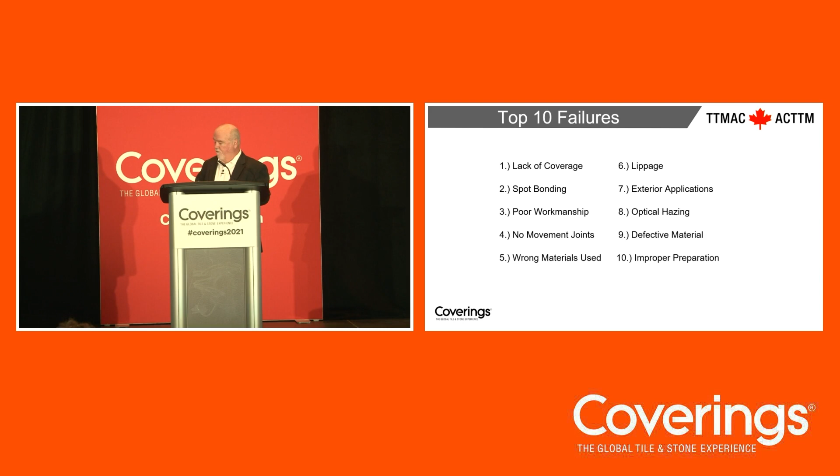So this is one of the ones that we see a lot, and that's lack of coverage. There's a lot of installers out there that still aren't following the recommendations of the NTCA or the 09 30 00 manual, where they're combing the mortar still in swirls. They're not back buttering. They're not placing the tile down perpendicular to the notches of the trowel and moving it back and forth slowly to push the air out and get in proper contact. And if you do that properly, in many cases, especially with a relatively flat back of a tile, it eliminates back buttering.

But this is something we see a lot. The first thing our guys do when they go in for an inspection is take a knife or something metal and start tapping it. Some guys like to use a golf ball. And determine what type of coverage they got. You can tell pretty quickly. And coverage is really important. We basically say interior 80%, and if you're doing exterior, 95 to 100%. And I tell you, you better try and keep it to that 100% if you want an installation that's going to have any possibility of having some life cycle.

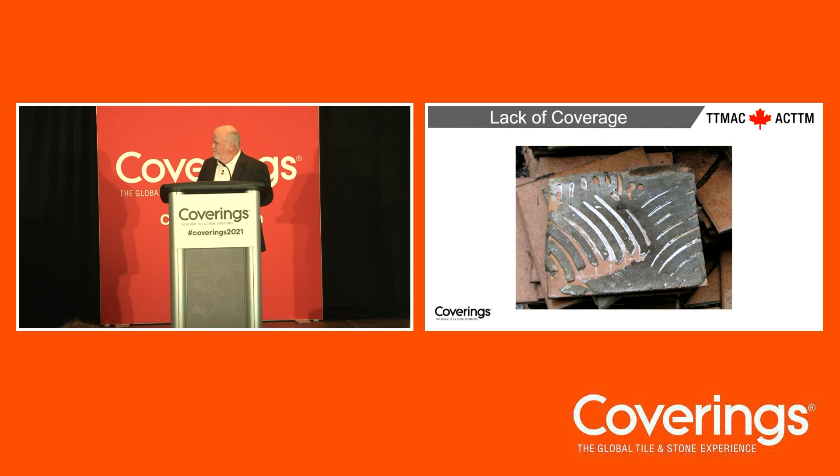This thing is sure sensitive. Huh, okay.

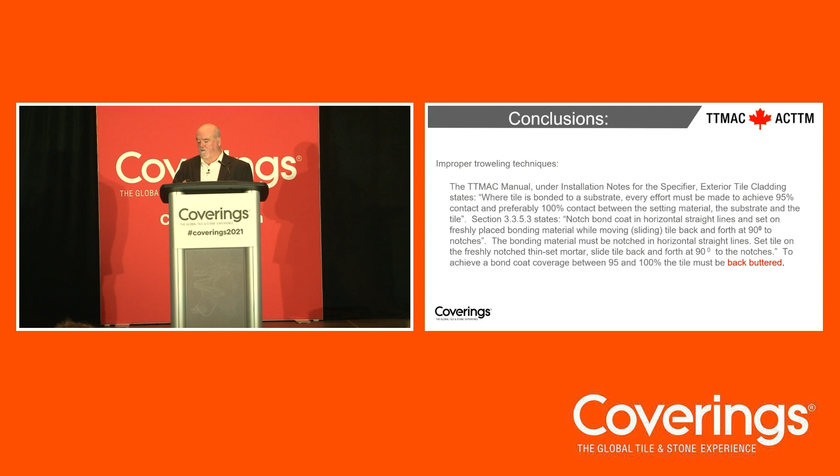So there, I've already kind of jumped through that, and this is from the TTMAC manual on improper troweling techniques. Again, the equivalent you'll find in the TCNA handbook. You'll find the equivalent referred to in the NTCA reference manual. But even though this is real basic stuff, guys, we see it all the time. It's really surprising how common it is.

This is another one I just don't get. And I've had guys tell me, I've been doing this for 25 years. It's always 25 years, I don't know why. But I've been doing this for 25 years, never had a problem. Spot bonding. It is on fire in Canada. I know it's pretty common in the United States. I know that Bart from the NTCA has said that they get calls all the time. It really is a really questionable installation.

Typically they're using just traditional regular mortar. They may not be using what we call the large and heavy tile mortar, which at least would have a half decent chance because it's made to go thick and won't have shrinkage aspects. But most of the guys are just using regular thin set. They'll be using a 118.4 or a 118.11 or 15 maybe. And even if 15, well, that's part of the large and heavy tile mortar. A 15 mortar still doesn't allow you to do this.

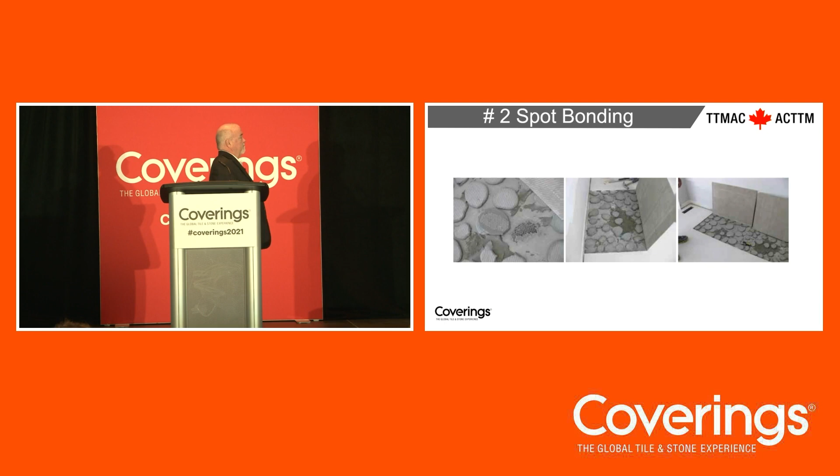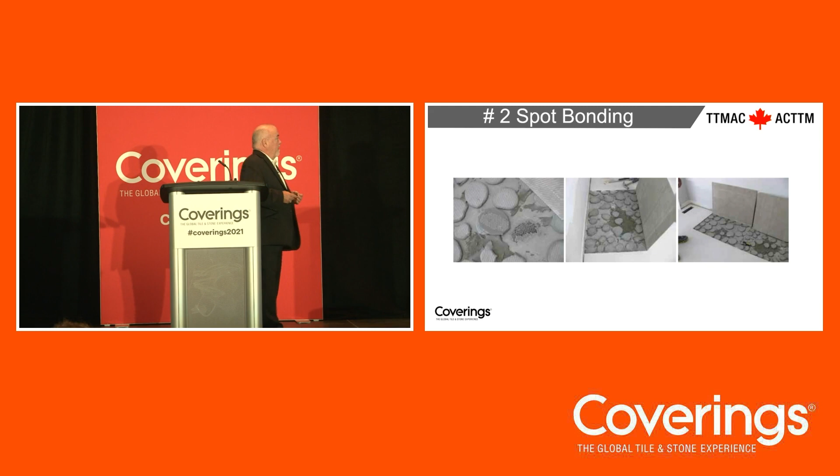But if you look at that, first of all, hollow sounding. Second, you're going to have a reduction in load bearing capability. Three, if you're in a wet area, shower area or whatever, or even worse outside, which I do have some photos of, where spot bonding was used. Where's the water going to go? It's just going to sit there and accumulate. Then you're going to have gray water, black water, mold growing, what have you. It's just a really terrible way to install tile, and we see it time and time again.

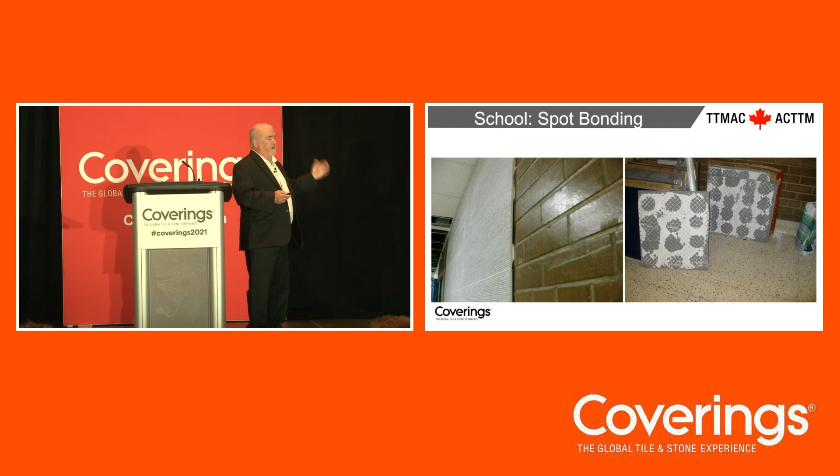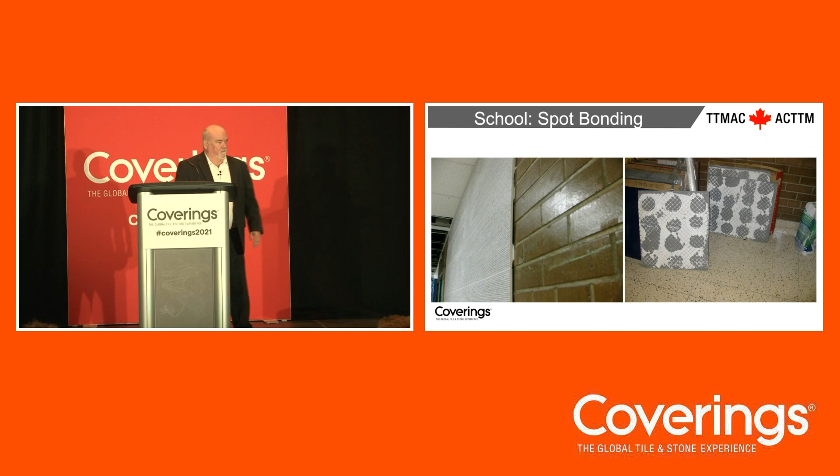Oops. This was really scary. This was a school, and we literally ended up taping off the outer area where this was done because those tiles, if you hit them hard enough, were falling off. So imagine, this is like an elementary school. One of those tiles probably could kill a small child. So really, just ridiculous to see this being done.

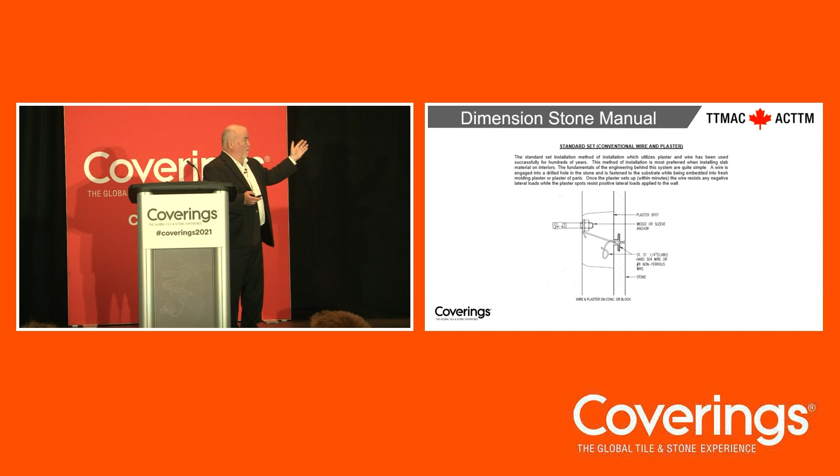Now you might say, well, where does this come from? At least in Canada, and this is the same in the Natural Stone Institute manual, there is a method of spot bonding for hanging stone. What they do, though, is they use pig wire, and they have mechanical fasteners on the back of that stone, and then they'll have the spot bonding behind there. So they're not relying on that spot bonding really to hold it up. It's really there to just make things uniform and even, and give it a little bit of support when they attach it to the wall. So this is where we're thinking this is probably coming from, but it really is an installation that's basically going to be a disaster.

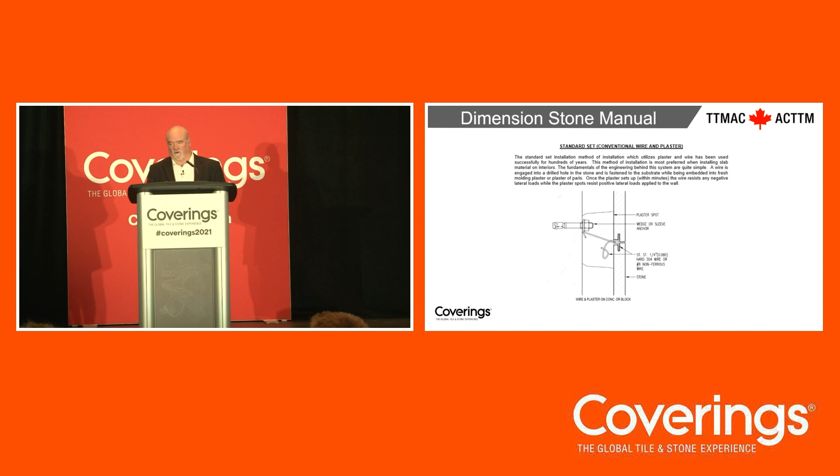And again, we call this out in the 093,000 manual. If you go to the NTCA reference manual, they've got a whole section on it, 2 pages, as we do in our equivalent manual with the Tile Contractor's Handbook. And it really is something that we strongly recommend that you do not participate in for an installation.

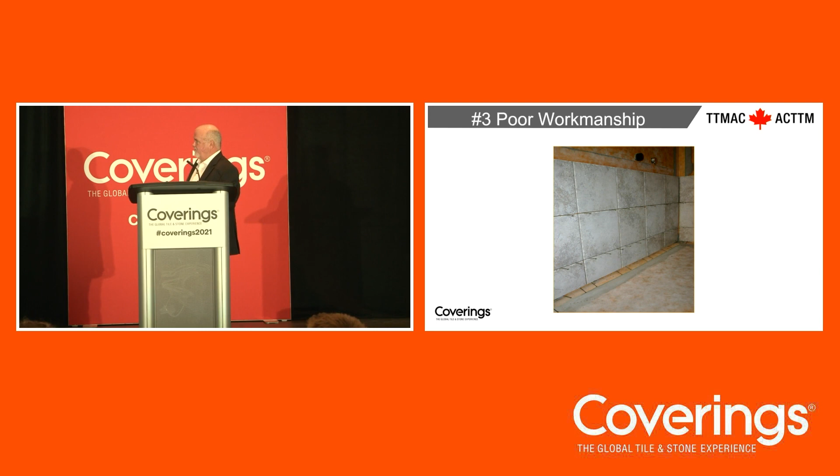Poor workmanship. What's wrong with this picture? That's a waterproof membrane behind there. And this gentleman actually sent this photo in saying, look at this, I found a great way to hang tile on a wall using nails. So obviously, this is not recommended by anybody. And obviously, poor workmanship to the worst extent.

And there's other references I had on here before, I lost my presentation, but in our 093,000 manual, we actually have a master spec in the back that is done by Keith Robinson. He is one of the top spec writers in North America. He not only has won awards in Canada, but he also wins awards down in the US. And there's a lot of architectural offices that will actually follow his formats in his master specs for whatever division. But anyways, it calls out the installation and the execution and the guidelines that they should be watching and making sure of.

It's something, again, every manual in the US, like the NTCA reference manual and the TCNA handbook, have areas where they give you the guidelines. ANSI A108 as well, in the beginning for general, tells you all these requirements to do a proper installation. No movement joints.

Whoops. This, and unfortunately I had a couple more slides that showed it from a wider view, but this was pretty amazing. This was a church in Quebec City, and they decided they wanted to clean up the floor, and they had all the pews on top of the floor, and when they moved the pews away, the floor literally just erupted, like you see here. It's like waves of tile that popped up.

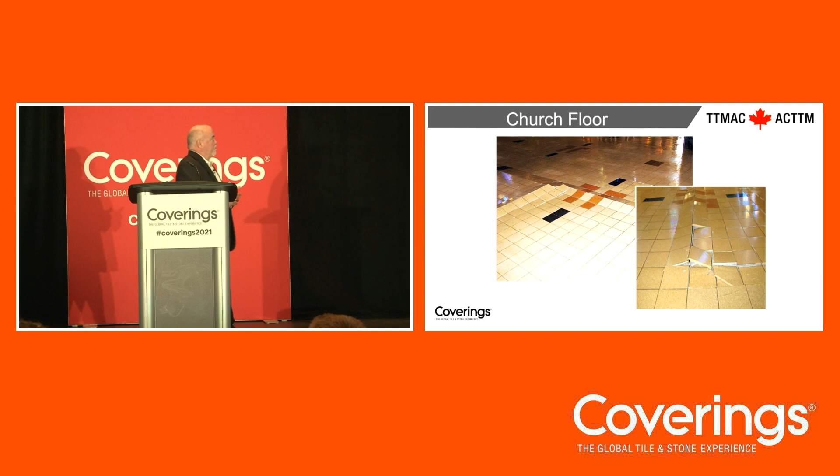changes in humidity, especially say you're on a wood floor. The wood is hygroscopic. It wants to absorb and release moisture, so it's going to expand and contract during seasonal changes. Hopefully you use some type of membrane underneath, like an uncoupling membrane, but still, it doesn't eliminate the need to have movement joints. And so in both Canada and the US, we have specific details in our manual.

Now, we don't have Wi-Fi here. You might want to just look at this. You could probably find it pretty easily. Just search on Facebook, tile popping or tile tenting. If I was able to play this video, they actually have video that people were able to witness where the tile looks perfect, and all of a sudden the tile just starts popping off the floor. It almost looks like it's fake, because you can't believe that's really happening. But there are actual people who have been able to catch that on video, and it's pretty entertaining to look at.

And again, that may not be 100% because of lack of movement joints. Lack of coverage is probably a big issue too. There may be bond breakers on the back of the tile that wouldn't allow for a decent bond. There are all those other aspects that need to be taken into consideration. And when we do an inspection, we are able to see that and we'll report it as such.

But the 093,000 manual, and then the TCNA handbook. And the TCNA handbook has actually evolved quite a bit. They've added quite a bit more information there. I didn't realize how much it changed till I went to the latest edition for 2021. So now I'm going to have to go and revise ours so it looks like we're keeping abreast of the new information that is out there, which Tile Council is now citing.

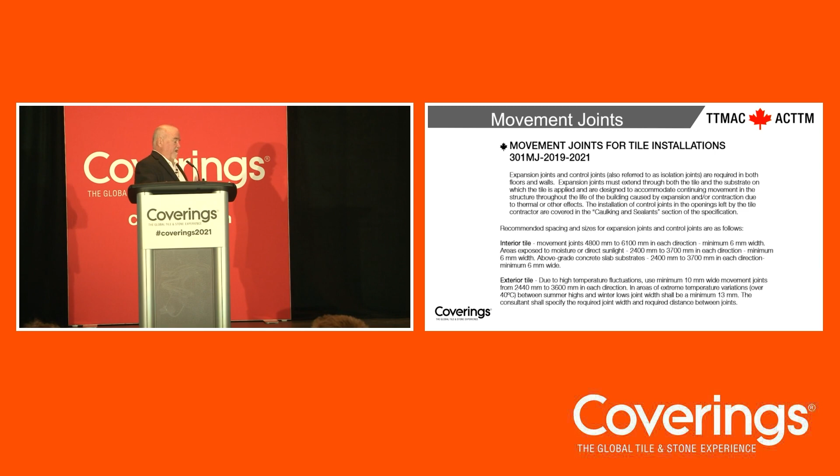So you have the equivalent in the U.S. The distancings are similar. Basically, you're looking at interior without sunlight, we can go up to about 16 feet in Canada. If it's interior with a lot of sunlight, we recommend to go no more than 8 feet. And then in exterior applications, same thing, a very conservative 8 to 12 feet max typically for allowance of those high fluctuations in temperature.

One thing we added, and this is actually out of ANSI A108. In Canada, we added the fact that you can now do nonlinear movement joints. We realize the only way you're going to do that is with a sealant, and you have to make sure the manufacturer does recommend that their sealant can be used in such a configuration, because you're going to have multiple stresses in different directions going on.

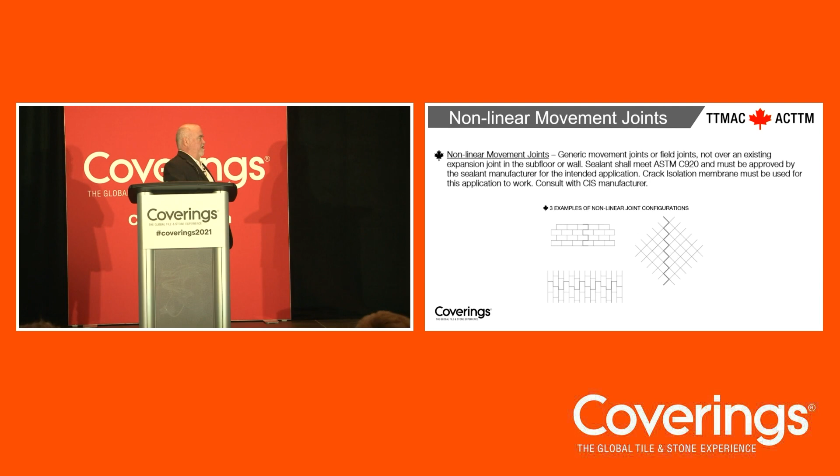But this has actually been a nice addition, because this is where we can sometimes get the architect to specify the movement joint, because they're not breaking up the tile field. They can do their basket weave, their herringbone, what have you, and get the sealant so if they blend it in properly, the color of caulking matches the grout so that it's not so visible to the eye. Whereas if they have to cut it, then obviously it now ruins the pattern. So we do recognize it now in Canada because of ANSI.

And that was a study that was done by Tile Council. At first, Tile Council said, no way. They said, there's no way you can do this. It's impossible. And then we had a consultant that said, no, I've done it. I've tested it, and it does work. I've got sealant manufacturers that say it's good. And TCNA did some testing over a couple-year period and came back and said, you know what? We apologize. You're right. It does work. So this is kind of a nice addition. It helps us for these issues where the architects don't want to or are reluctant to specify.

I'm sorry, does it increase? No, not really. I would expect that they're probably going to want to match the grout joint width. But if they go really tight with their grout joint, then they're probably going to have to go wider. Typically, 3/16 of an inch is typically the minimal thickness. I've seen 1/8 inch sealant joints.

I've got malls near my house. I live in Canada, in Montreal, and they don't work. I'm telling you, it's just too small. Maybe if they did a higher frequency, but they don't. They'll still try and do, say, 16 to 24 feet, because it's closed in, no sunlight and all that, with a 1/8 inch sealant joint. And I've got a mall near my house where the tile is lifting in different areas. You walk on it, you can hear it, it's hollow, because it's debonding from the substrate.

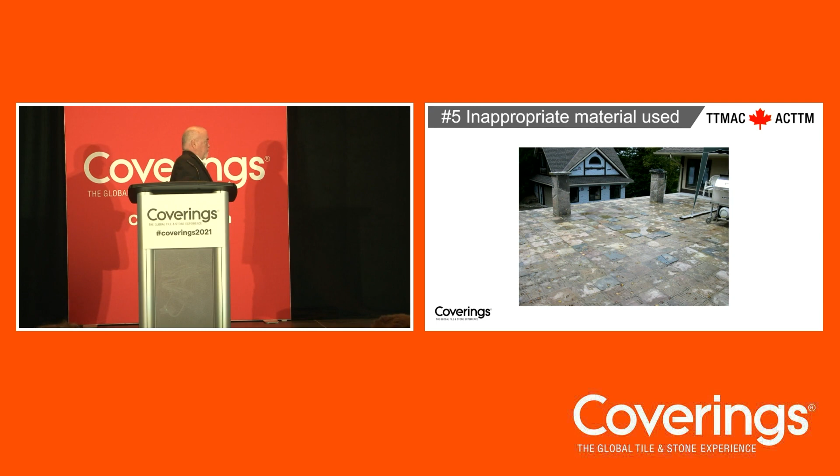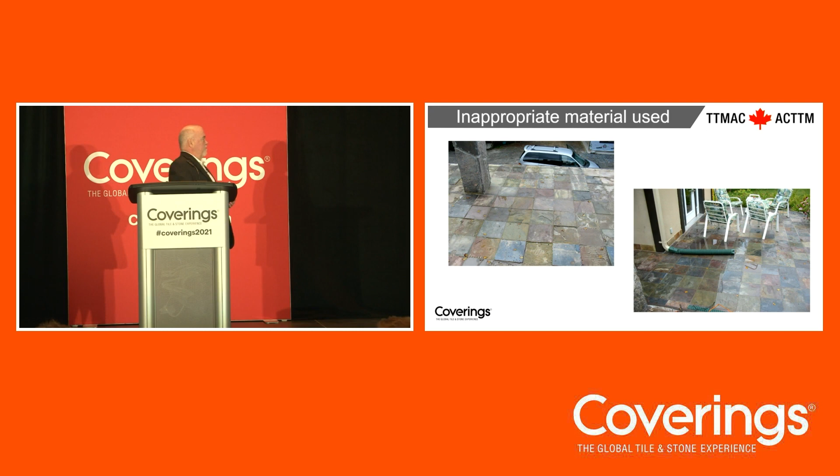Same photo. Now, again, notice the water collection. They got negative slope. So, you talk about shooting yourself in the foot. They did about everything wrong so that this thing would be a disaster.

This is bluestone. Bluestone's extremely water absorptive. And this is in Vancouver, on the coast, right on the beach, near English Bay, if you know Vancouver. And every time it rains, you get this halo effect where it's dark, depending on where it is in its drying period. The customer was really upset with this because they had bought this gorgeous stone, expecting it to look uniform and beautiful, and then every time it rains, and they did try putting some sealers in, it just doesn't work. And they had this halo effect going on.

One of the things that they could have done differently was to put a drain mat underneath, because this was a mortar bed that they used underneath it. So at least when the water got in, it could easily then evacuate from the area with, again, a good proper slope, 2% off to the outer edge of the balcony. But really not probably the best material for a wet environment like Vancouver.

I mean, my father always joked in Vancouver, because that's where he lives still, that they have the Vancouver Rain Fest, starts January 1st and ends December 31st. So we get a lot of rain there.

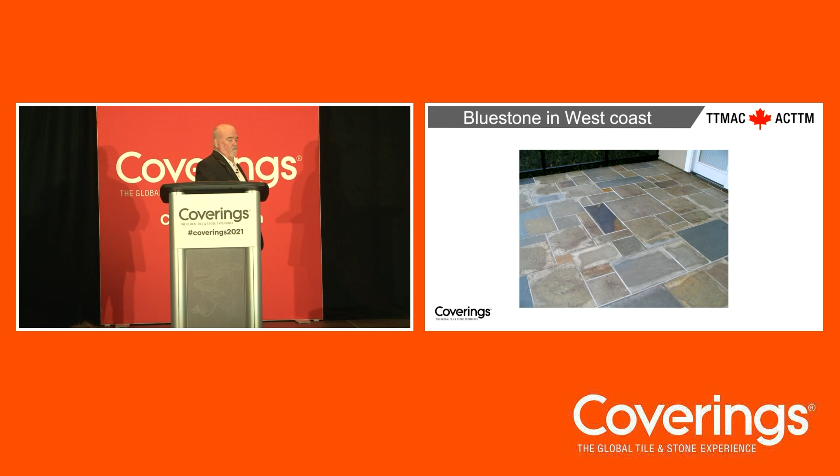But the reality is, if you walk the show, it's absolutely unbelievable what they can do with porcelain today. With the 3D, they can do it with the ink, but now they're doing it with the glaze. And instead of using a natural stone outside, and I hope Chuck's not here from the Natural Stone Institute, to me, I would be using a porcelain outside that looks like stone if that's what you want, but God, you're gonna have none of these issues. You still have to install it properly, but to have your expensive stone like this really not giving you the appearance that you're looking for, it's just not worth the expense or the anguish.

So what we do have, and this is reminiscent of the NTCA reference manual, and I think the TCNA handbook also has a section on this. Their book is so big, it's tough to keep up with it. But there's a listing of unsuitable substrates, which hopefully most of this is pretty obvious to you. And then we got some of these questionable substrates. When the questionable substrates come up, this is where you really need to talk to your manufacturer, talk to the installation materials representatives and find out what they recommend for these types of situations. Because they probably have a solution. And if they don't, then maybe you should think about not going over top of that substrate. But you can see that the list is pretty big.

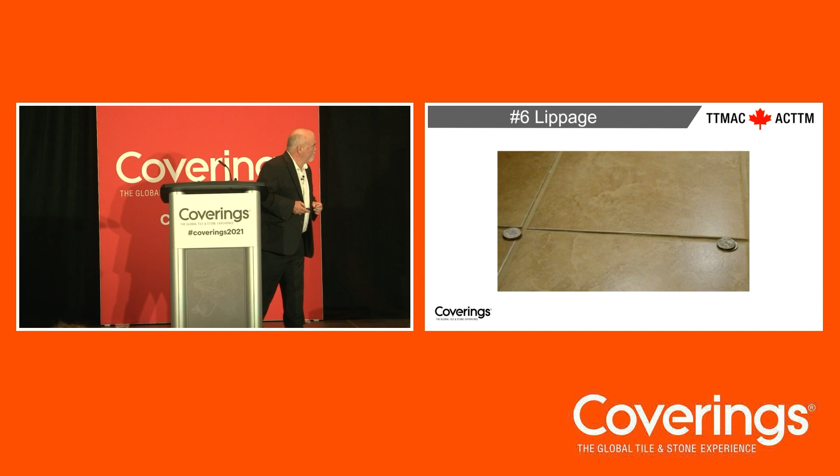Another big one is lippage. I mean, this is terrible. You catch your toe on this. You got a tripping hazard with this installation. You can see they're using, was it pennies? Pennies, or I can't quite make it out. But anyways, they got 2, almost 3, I think it's pennies, to just show you how much lippage was going on in here. There you go. If that was on a wall and you want that kind of look, some of the new trends right now are kind of reminiscent of this. This is a floor. And notice what they got going on there too.

Is that a 1/3 offset? Well, if you look at it, it's inconsistent, but some of those joints are right in the middle of the next tile. If you look at the third one up, it's almost right in the middle. So of course the lippage is going to be really excessive. Especially with these rectangular type tiles, you really want to do the 1/3 offset, which is recommended by NTCA, TCNA, and the 09 30 00 manual in Canada. Yeah, this is actually not a residence. This is a commercial installation, if you can believe it.

So again, you have your guidelines that reflect the maximum amount of tolerance in the facial dimensions of the tile itself and what's allowed, and then you combine that to come out with your allowable lippage, also based on your joint width. This is out of the 09 30 00 manual, but it's pulled out of ANSI and is also shown in the TCNA handbook as well.

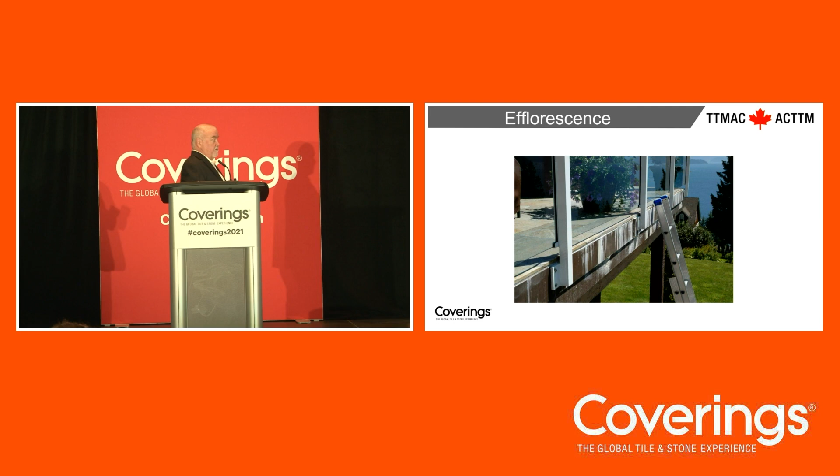It's soluble salts from the Portland cement washing out because the mortar underneath is being exposed to moisture. And if you don't tent off or hoard your installation and make sure that mortar has a chance to set up, that's really the key to try and prevent efflorescence. And I can tell you, there are some mortar manufacturers out there that do claim they have efflorescence-free mortars.

If everything's perfect, maybe, but I've used some of their products and it still had some efflorescence. Now, nothing like this, but if you don't hoard it and let it fully cure, you're going to get, where the additives within that mortar, because most people are using a modified mortar outside, haven't had a chance to coalesce completely, you're going to get this type of occurrence because it's not locked in.

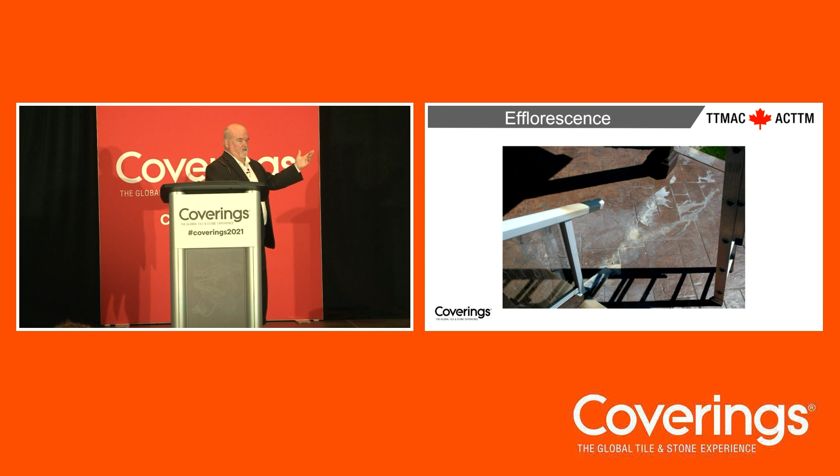This is underneath. Actually, I jumped further. This is from underneath, looking from the ground. This is actually a politician's house just off Vancouver Island. You can see it's going onto the glass. The glass was being etched. This is in Florida. Stalactites. Same thing. They go in and have to use a power washer to clean that off.

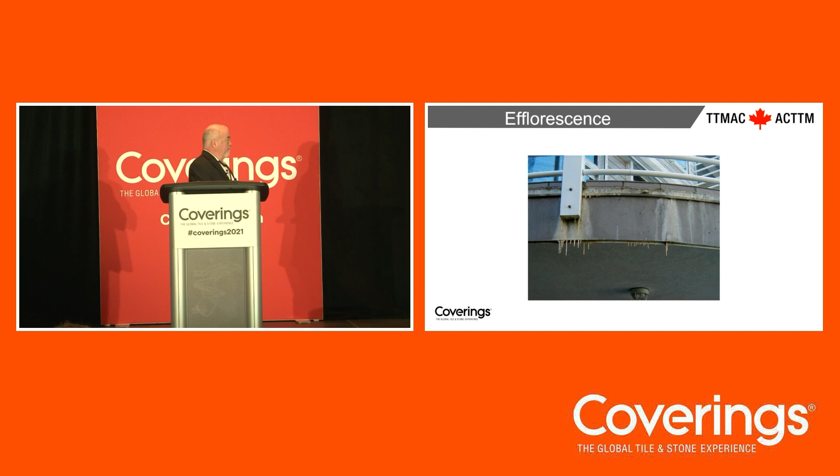This is disgusting. This again is another shot off of Vancouver Island, or one of the islands in the Gulf Islands, I think, and absolutely a mess. And they obviously had to just tear it out and redo it.

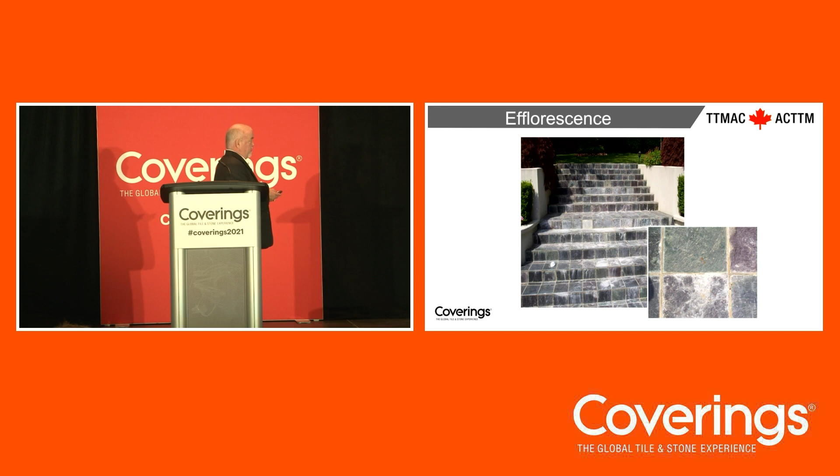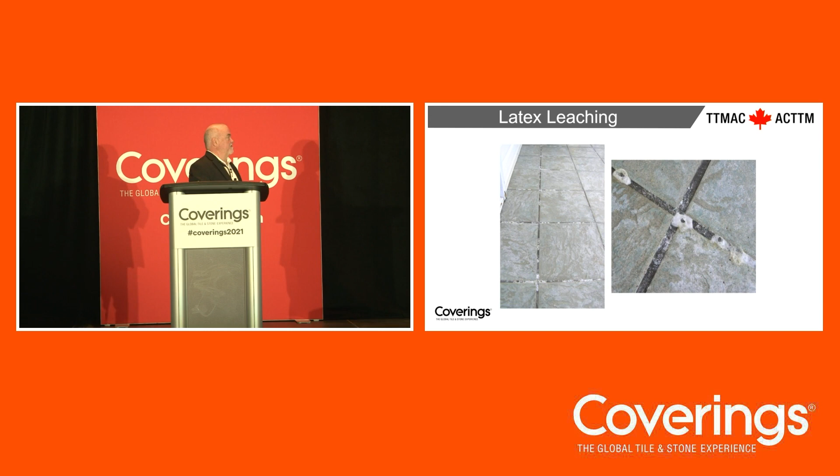Again, it's not going to go forever. Eventually, the supply is going to become less and less. But you're probably going to find, too, that the mortar's getting weaker and weaker, and you're probably going to have your tile starting to debond.

This is a house in Whistler. And again, you see a common theme here. Everything's from Canada. Again, I'm sorry. I did have American slides from other jobs that would be closer to reference for you. But this was a job in Whistler, a multi-million-dollar chalet. And this guy was putting flagstone down, the installer, and he was German trained, a really meticulous installer.

And when he came to install, they said, well, we're not going to drop this balcony, because he wanted to drop it down so he could flash up and go underneath the logs. There's logs on either side of the doorway here. And then the threshold was flush to the French doors. And they said, don't worry, we have a maintenance guy who's here. So whenever it snows, he comes and shovels everything away. He's got squeegees, so he pushes everything away. So we don't have any issues. Don't worry, we don't need to worry about the flashing. And there was practically no slope to this deck as well.

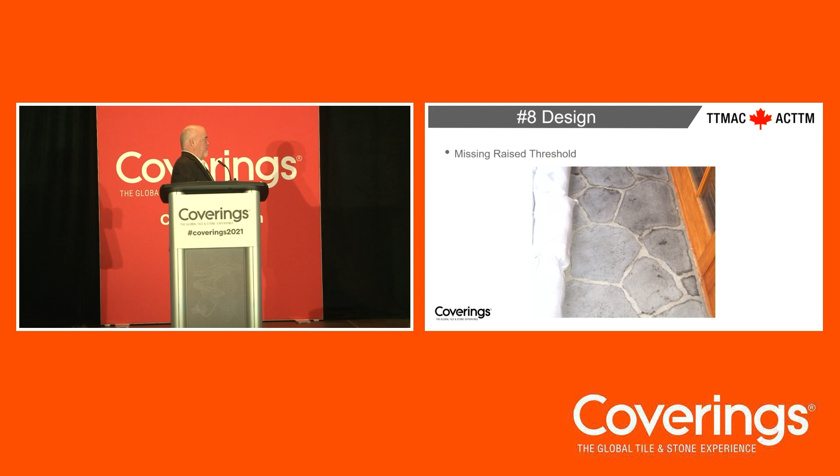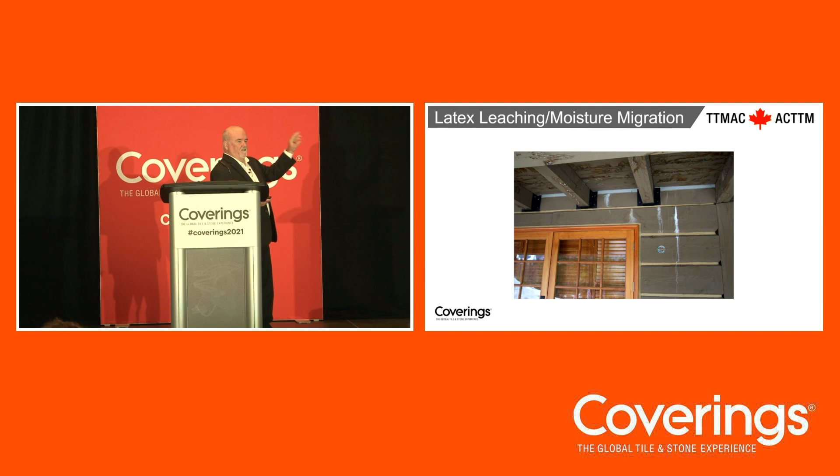So water started infiltrating, and you can see that kind of black-looking residue on the backside is because they have concrete board on top of the wood there, and to cover up where the gaps were so you couldn't see the concrete board, they thought, oh, you know what, let's put tar paper down. So that is residue from the tar paper getting wet and starting to break down. And if I was to go a little bit forward, there's a beautiful patio set and a spa, and it's all stained from the residue coming through.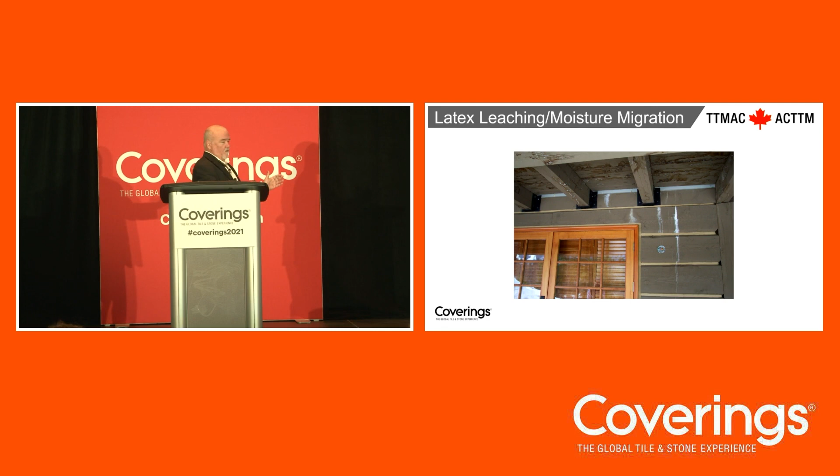And so what we did is we got called in to help this contractor and went to take a look at it, and we said, well, let's find out where the leak is. So we did one in the middle, and the middle worked out okay. We sandbagged it, filled it up with water, gave it 24 hours, nothing happened. Then we sandbagged against the wall, and the water literally just flew through and was coming down because he had nowhere to flash the waterproofing up underneath the logging on the skirting on the balcony.

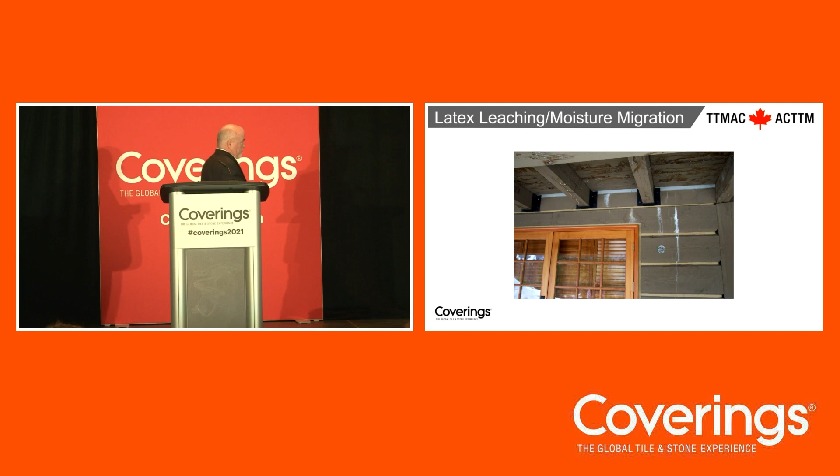So this is, I actually chaired this committee, and this is in both the Canadian and the American NTCA reference manual. It's about 3 pages long on the guidelines of doing exterior applications. And we consider it almost like a checklist. And if you're going to do an exterior application, check off everything that's in there that you are able to do, that you're going to be able to do this.

Because if you skip and you think you can get away with, okay, well, I'm not going to do a 2%, I'm going to do less than that, or I'm not going to flash up the walls just like the previous installation, I guarantee you, you're going to have a failure, and it's going to be catastrophic.

Decks, when they fail, they're not cheap. I'm telling you, you're going to be looking at literally tens of thousands of dollars. Working from Schluter, we're not perfect. We've had some installation failures exterior. One that comes to mind was over $65,000. I even paid to have the house cleaned inside because of all the debris when they went back and redid the deck. And that's not even the max. We've got installation failures that we've seen in Europe that were hundreds of thousands of dollars.

So this is really a great guideline to follow, and definitely marry with a manufacturer that warranties their products for exterior applications, and hopefully will even send one of their representatives to come see you while you're doing the install. Make sure that you're not missing anything by chance. Making sure everything is good, because for the amount of expense that you're spending for an exterior application, you don't want to have a callback.

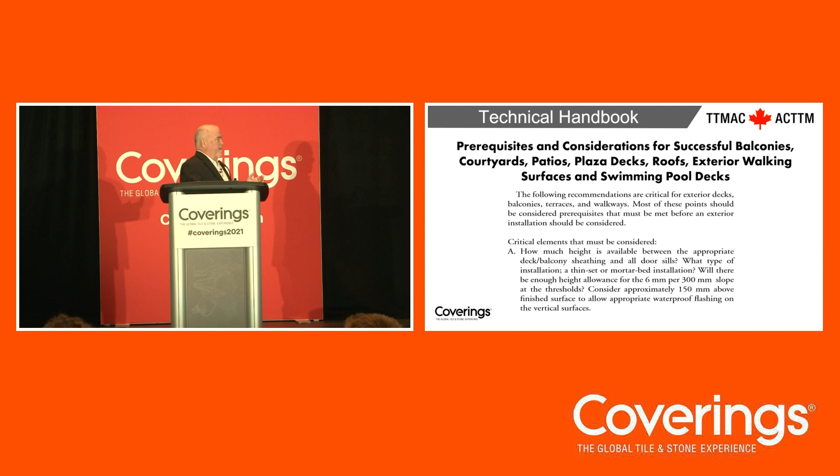In Canada, it's detail F325 ED for exterior decks. And we've got about 5 different generic details that identify different methodologies for trying to do an exterior application. Oops.

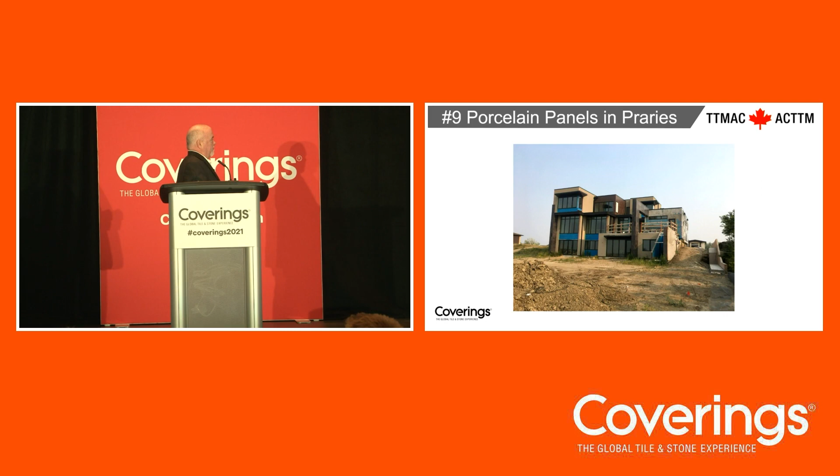Now, this one here is pretty interesting. Thankfully, you can see there's really no neighbors close by, but they decided to put gauge porcelain on the exterior of this house. I mean, it's pretty ugly, but anyways, they wanted to put gauge porcelain up on this installation. First of all, they went over a wood backing. And if you go into any of the manuals, they'll tell you, you can still have wood backing, but you got to build out from there.

You fur it and you put the backer boards, like concrete board down, or maybe you're going to use wire lath and mortar on top, and have a cleavage membrane slash waterproof membrane on the back. But anyways, this installation was just an absolute total disaster. Look at the troweling techniques. Now, here's the funny thing.

The contractors that did this job said they went to school, went to one of the different tile manufacturers. There's a couple out there that are doing training where you can go, or go to a local distributor that sells that product, and they'll do like a 1 or 2 day program teaching you how to install gauge porcelain. And I think most of you know it's a totally different animal. It's not like tile. Everything, the troweling techniques, the equipment that you use to cut it, to transport it.

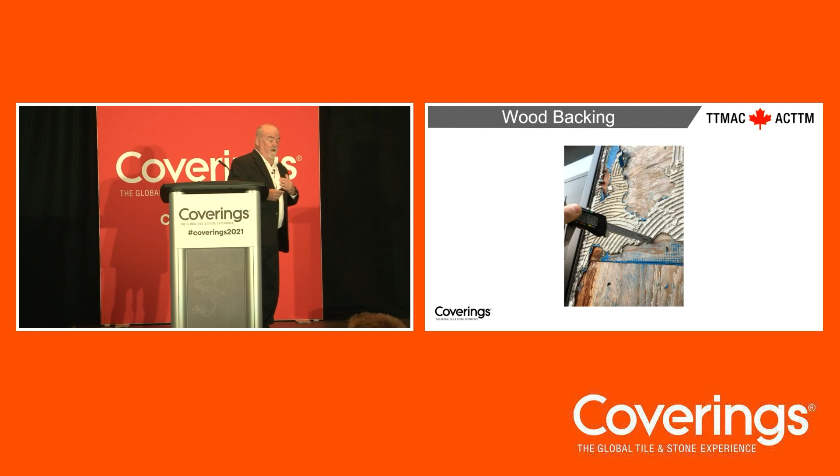I did my own project a couple years ago, doing the walkway in front of our offices with gauge porcelain, 1 meter by 3 meter. And what an enlightening that was, because we bought all the equipment to do it, and it was not easy. It was a big installation, I guess it was probably about 600 square feet. It took us over a week to get it all installed. And we hoarded it, we had tenting, the whole works.

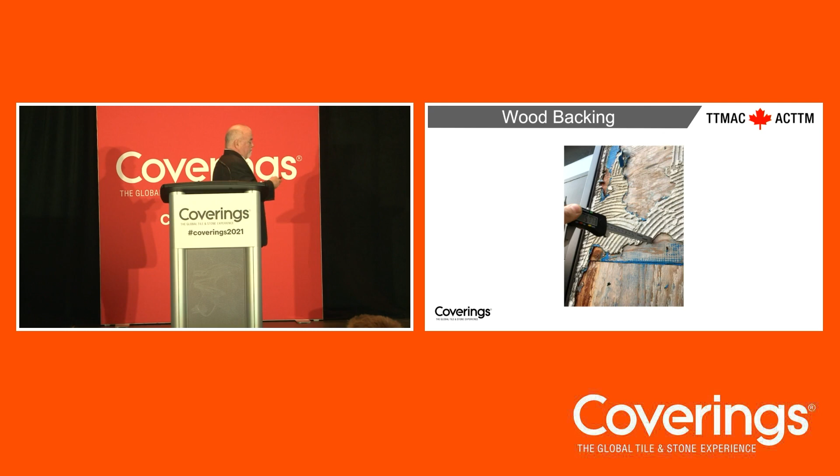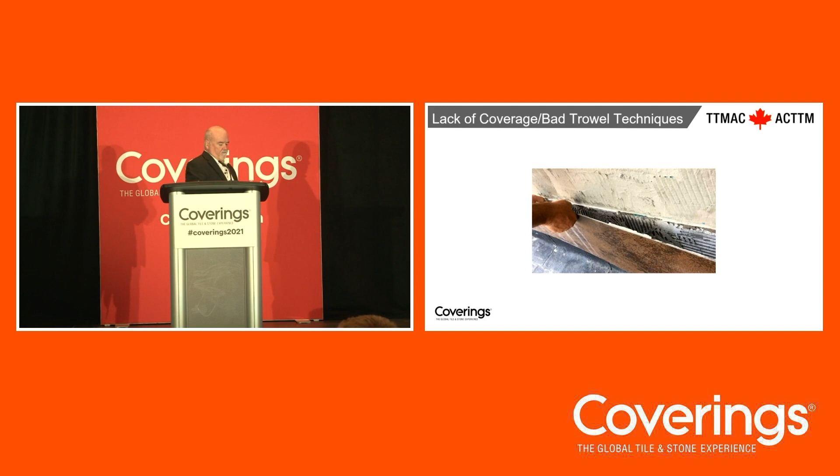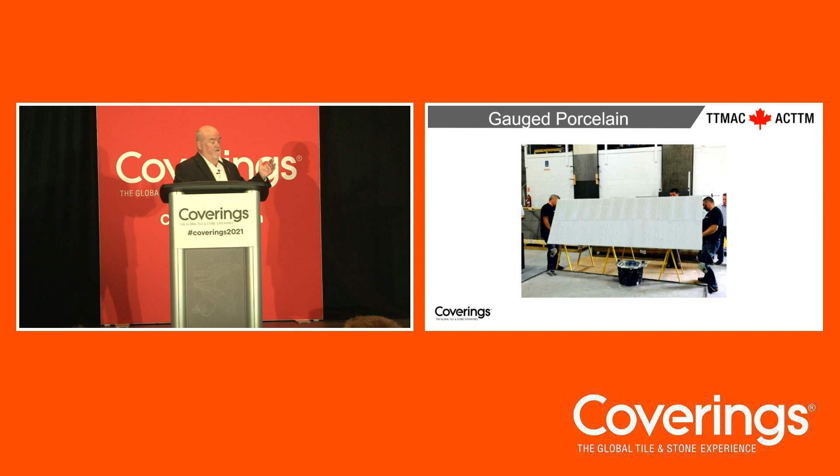And then what you do is you do the same on the substrate. You comb out your mortar. And then when you combine the two, it creates what they call a zipper lock. So the mortar locks itself in, and you got 100% coverage, which outside you for sure want to have. And you are making sure that that tile is not coming off. It's going to be staying there.

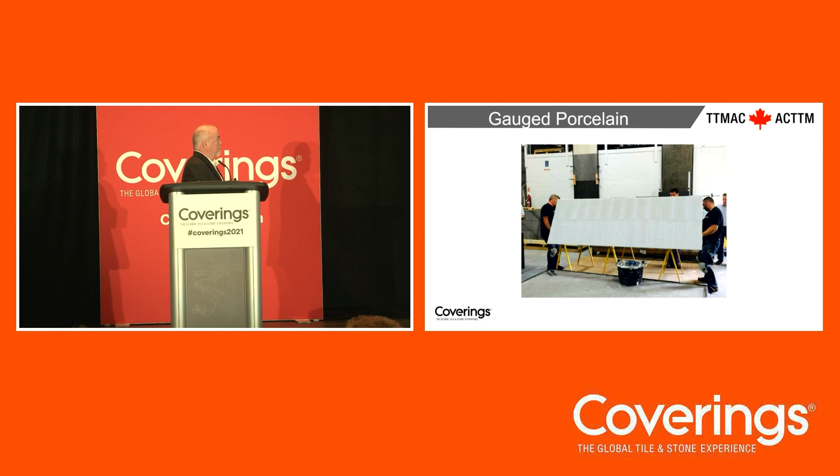Even for interior applications, there's specific requirements if you want to go directly over the wood, typically double layer, and there's other systems out there that eliminate having to use that second layer of plywood if you're doing interior, but exterior we don't recommend it.

So new for 2020 is a standard that follows actually the one in 2017, which was for interior applications. But this standard now is available. You can purchase it online through Tile Council, tcnatile.com. That's how I got mine. But definitely follow the installation guidelines that are cited here. Otherwise, you're probably going to get yourself into trouble. And that's the predecessor,

108.19 for interior. And this leads me to a little concern that we have, is that 108.19 recognizes going over wood substrates for interior. In Canada, we actually don't. We think that there needs to be more testing, more R&D done, because what it really comes down to is, and I sit on the different committees, when they tested these gauge porcelains, they used, it's not the only thing, what they call the Robinson floor test.

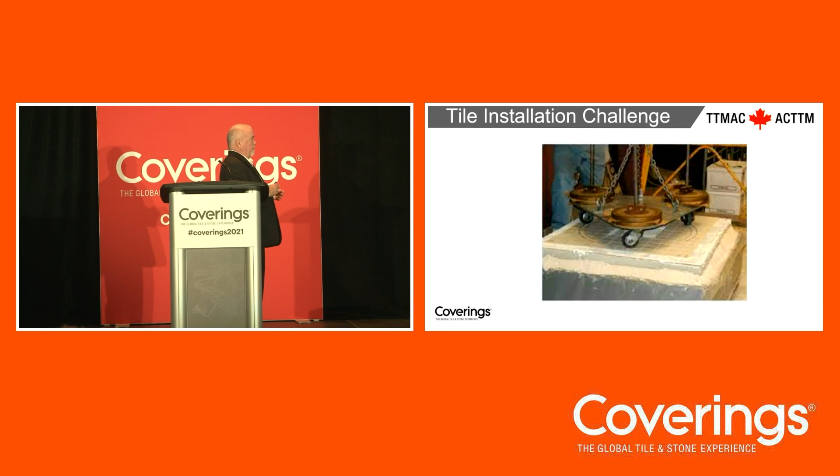And when they did the gauge porcelain, they cut it into 4 tiles and condensed it down to this 4 foot by 4 foot pad, on wood and in the same assembly as I mentioned. Well, you're really only testing one thing: the bending moment of the subfloor. You're not getting the joists bending and deflecting. You're not getting vibrations. So you've got kind of the best situation.

And I've talked to some of the manufacturers that were part of the testing, and they always said the biggest issue was the joints for these large gauge porcelain tiles. If there's any movement there, deflection, and the edge is a little bit exposed, they chip and then they just start breaking down. And just think about it. These gauge porcelain tiles are about 5 millimeter, a little bit thicker, 6 millimeter.

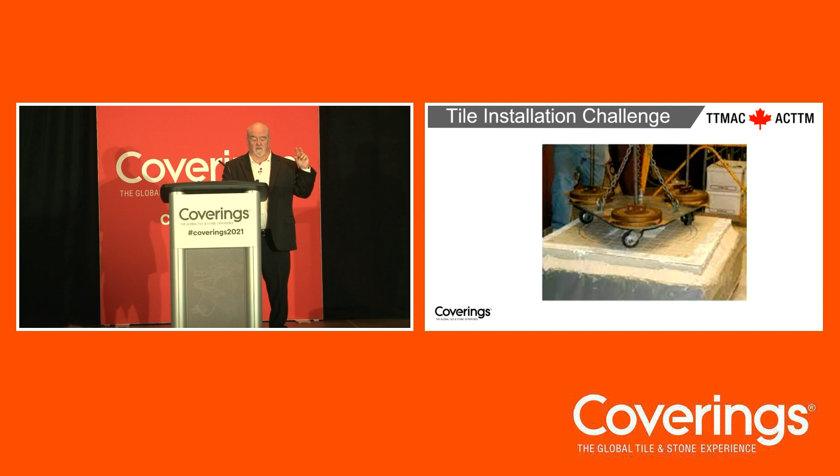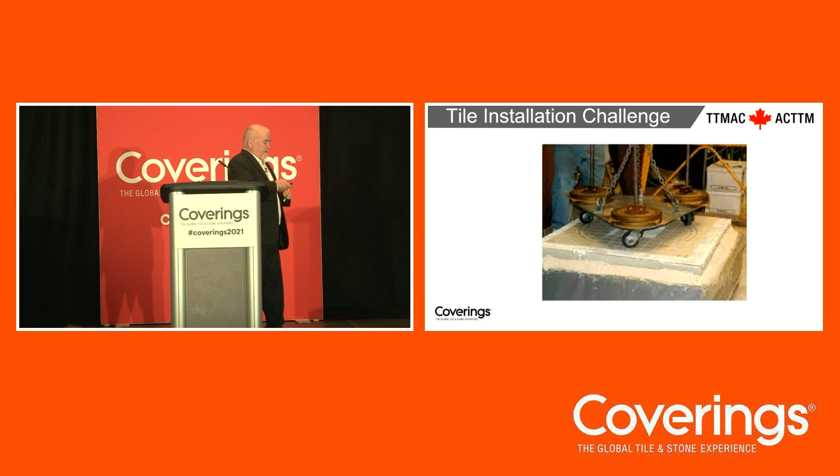But there's 5 millimeter, and there's some even 3 millimeter, which still to this day we're only recommending for walls. But the reality is, if you've got a bending deflective floor, and this is our universal floor tester that we use up in Canada, because we are able to go from the top down, this gives us a chance to be able to build up to 40 inches of construction height. We suspend the floor on pony walls. This is about 14.7 by building code without having to add blocking or cross bridging. You can go up to 14.7 in Canada. I think in the United States it's similar.

And we run the Robinson on top there, and we get full deflection of the dimensional lumber in this case, but we can, of course, put trusses in, we can put I-beams in, things of that nature. And we really actually emulate what you're going to see in a real true life situation. Now, the reason I bring this up, I sit on the ASTM C21, which governs the Robinson floor test, governs a lot of other things for the tile industry.

And I've been asked to make a proposal on creating a new test method similar to what you're seeing here, so that we probably will, within a couple of years, come out with a new test method for doing installations over wood that emulate more the true situation that you're getting in a real life condition. So until we get that R&D done, in Canada, we don't recognize it.

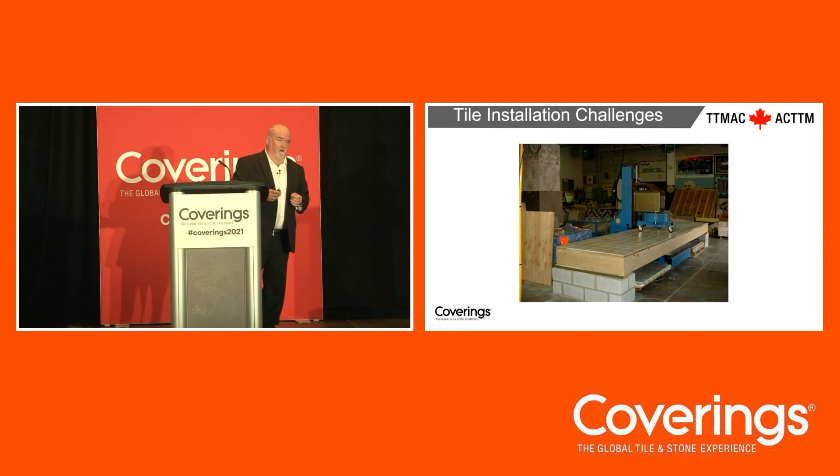And I've had one of the manufacturers of the gauge porcelain, who's based out of Toronto, but originally from Italy, come to me and say, listen, you got to change this. And I said, look, help me. Give me some money. And I'm wearing my TTMAC hat, and pay for some of this testing. So anyways, he never came through, but I'm going forward with it anyways. I'm allowed 3 tests a year for R&D purposes paid by our association. So in the next month or so, I'm about to start doing my first suspended floor testing with gauge porcelain, which then will be the kickoff to start the work on doing a new test method with ASTM C21.

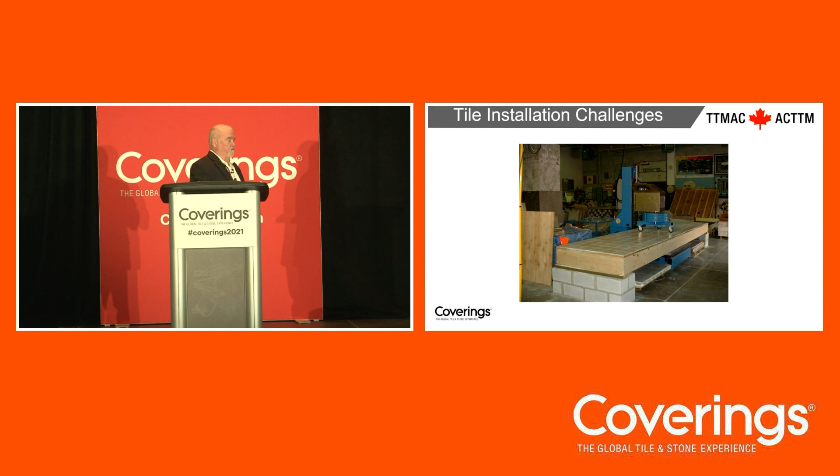Optical hazing is probably not as prevalent as it was, especially since China pretty well has almost been eliminated from the United States because of the duties that have been now applied to them.

And unfortunately, there's not a whole lot you can do about it. You can try and go in and try and grind it, I guess. I did have somebody who said they did it. It was an absolute disaster, so they ended up having to tear the floor out. But really, optical hazing is still out there, and we've seen it in Canada. We've had probably about 3 or 4 failures. Or I guess you really can't call it a failure. It's really an optical issue. But of course, the people weren't happy with it, and they wanted it torn out.

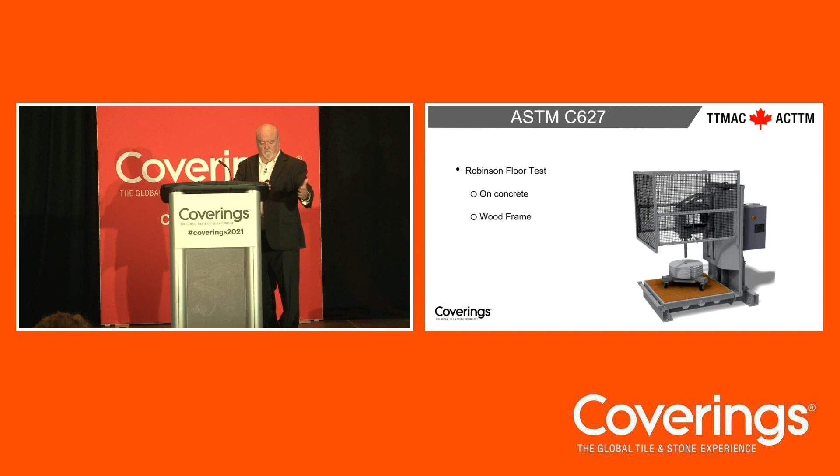Well, think about it. A backer board, you always hang a sheet of polyethylene behind it, because backer board is not waterproof, it's just water resistant. Moisture does get through it. That water hits the polyethylene sheet, comes down, it's locked in. There's nowhere for it to go because you've got banding going up and it's now basically on the plate in your wall, and you've got yourself a disaster waiting to happen. You're probably going to have black water, and then you're going to have mold, and it's just going to be terrible.

But what I wanted to mention was those type of installations. I've got a big contractor that I'm friends with, and he said, look, I like to spread the wealth. I didn't want to give everything to everybody. I said, yeah, but what are you going to do when it fails? Who are you going to point your finger at? You go to the manufacturer of the trays, they're going to say, how do we know it's not the trowel-applied membrane that's causing the failure, or the backer board is the culprit? You're just going to have a shouting match going on, and you're going to be stuck probably with the bill.

And so I do cite it in the NTCA reference manual: make sure that if you're going to go with different manufacturers' products, one, that they're compatible, and two, what the warranty is. And make sure that warranty is not just the value of the piece of paper it's written on, that they actually have some depth in there. There's warranties out there that basically just say, we'll replace the materials. Well, that's nothing. And a lot of times it's based on the original cost from when you did the install. You want a warranty that has labor and materials, because your biggest cost is probably going to be your labor, tearing it out and putting it back in. So be really careful with that.

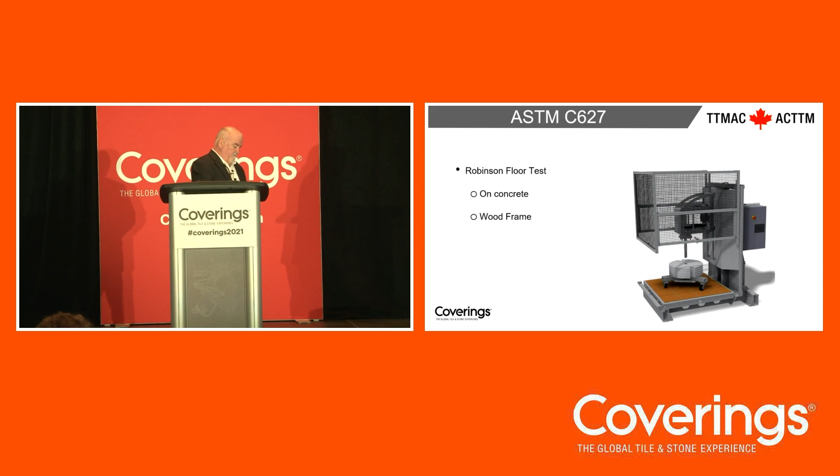So, as you can see, I'm on my last slide. My original presentation had a few more. But anyways, I think we've got 4 minutes. Are there any questions? What I'm going to do is, with the management for Coverings, I'm going to update this presentation. It really makes me upset that I wasn't able to show it to you, because I did put about 4 hours in, with some new slides, some new photos and a lot more of the American referencing. I apologize. A lot of this was Canadian because it was a Canadian presentation originally.

But rest assured, a lot of it is very similar, and we do have a lot of parallels between our countries, and we love working together with our different industry associations. And our goal is to try and keep these installation failures from happening. Work with the guides; I'd recommend that, and I know in some cases it's really difficult. The TCNA handbook is the yellow pages. You can get it all digital. I've got all the different ANSI specs and the manuals in digital form, and in my office I've got the hard copies, but the digital forms are a lot easier to carry around.